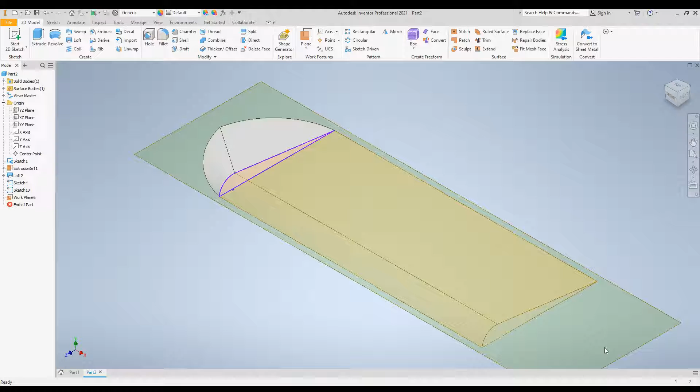So I'm going to click on that, and then I'm going to click this side edge. In order to define a plane, you need two lines. As you can see, this gives us the plane that goes along the bottom of the glider. Now if you look in the model list here, we have a new work plane.

We're going to right click on that work plane and start a new sketch. Because I already did this at the top, it's taking me there, but we're going to want to scroll all the way down here to the bottom.

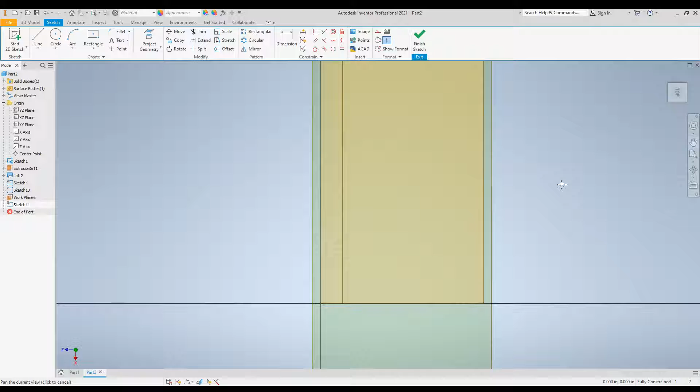You can create some guidelines and things like that to help constrain your arc so that it's symmetrical with the top. I'm not going to do that. I'm just going to wing it here so you get the idea quickly.

You want to make sure that your corner points line up with the extrusion, and you'll know they line up because they turn green. Anything that's lining up turns green.

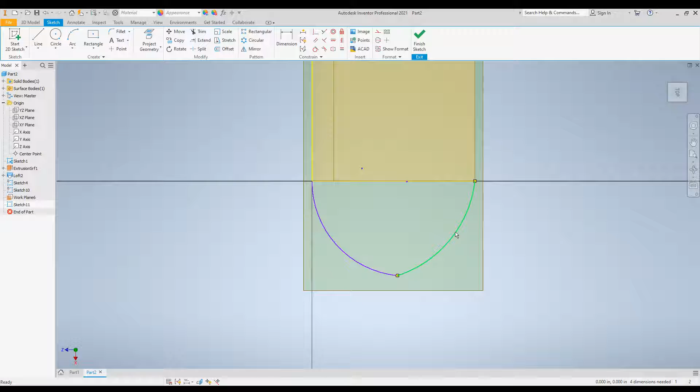Notice I have my two points on my arc here, but I don't actually have a closed loop yet. So the way we're going to close the loop is if I click on and highlight the arc, I'm going to right click, and there should be a tool here that says close loop. So I'm going to click on that, and click OK.

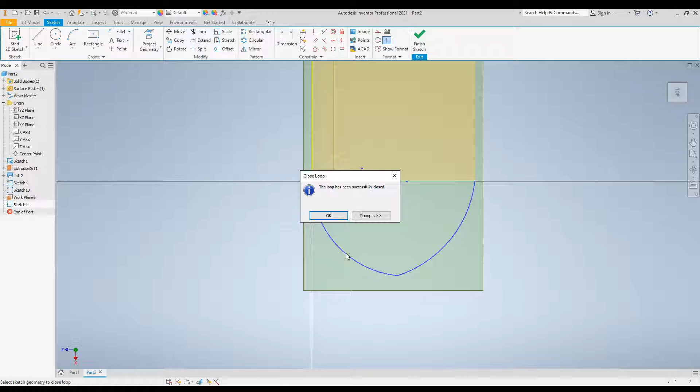I'm going to click this line in my extrusion, then click this line in my loop, and it says my loop has been successfully closed. In order to extrude, your loops need to be closed. So if you're having trouble extruding, even with your cambering line, double checking that it's a closed loop is always going to help.

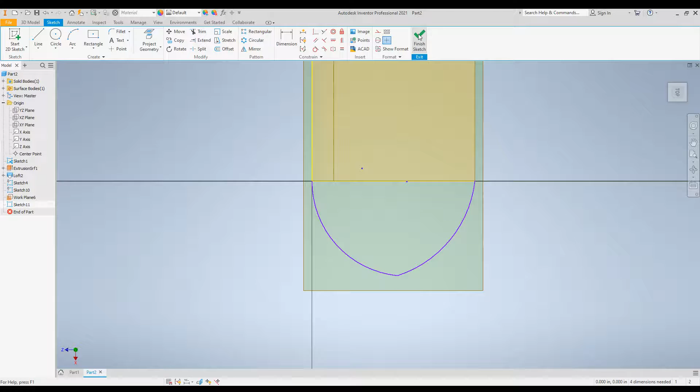All right, so now I can close this sketch, and I've got the bottom part of my shape. Now I need to do the cambered part of my shape.

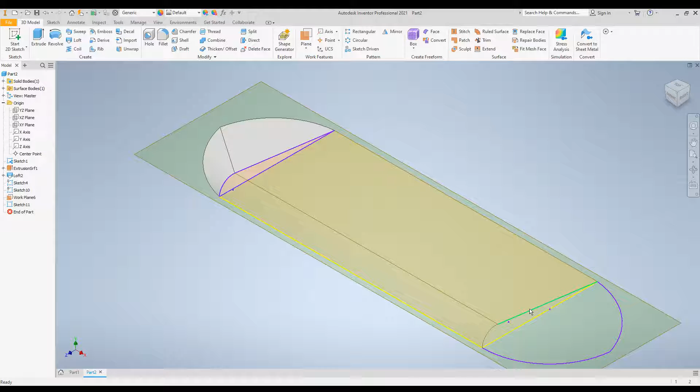As you recall, or maybe you didn't recall because you didn't build this with me, I made this sketch over here and then extruded 10 inches to the right. So this end is actually just the end of the extrusion, not a sketch. What we can do here is right click on this and give ourselves another work plane. Remember, we need at least two lines to get our work plane.

Why isn't it letting me click OK? It's not happy. For some reason, I'm going to escape and do this again. So I'm going to click this line, work plane. I want this line, but it's not letting me pick it. Why? Okay, let's try this one. Work plane. It's definitely not happy. Why? What did I do wrong?

I'm confused, it doesn't know which plane I want, and it's not letting me pick. Finally, is it letting me pick stuff now? It's just not asking me if I want that work plane. Oh, but it actually made one of them.

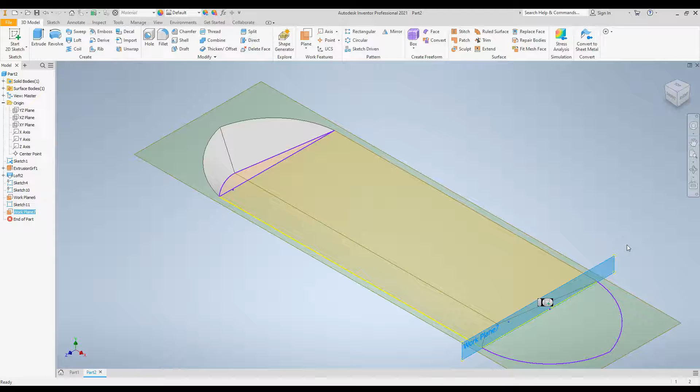Okay, so I'm going to delete one of these so it's not so confusing. All right, so now I've got this work plane. I am going to open a sketch. I'm going to click on the work plane and do a new sketch.

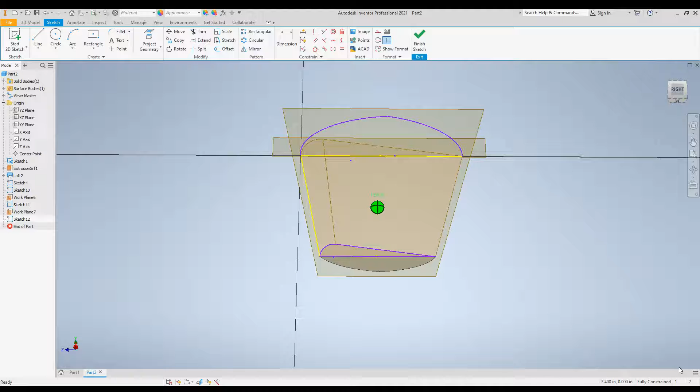Now notice I'm looking kind of at the sketch from the other side. That's not actually the sketch from this side. So if I change the angle here just a little bit, you'll see that actually it is showing me the sketch. Why is it doing that?

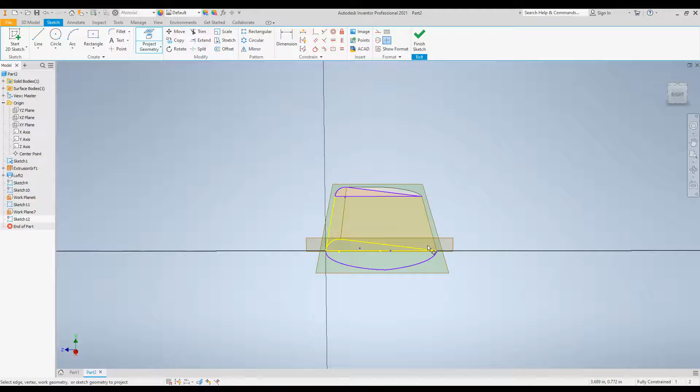Oh, no, it isn't, it's showing me the other one. So what we need to do is project the geometry from this other sketch onto this sketch here. So I right clicked on the line, then clicked project geometry, and I'm just clicking the next one here, project geometry, then clicking this one here, project geometry. So what I should have now is this sketch should contain the geometry from the end of the extrusion.

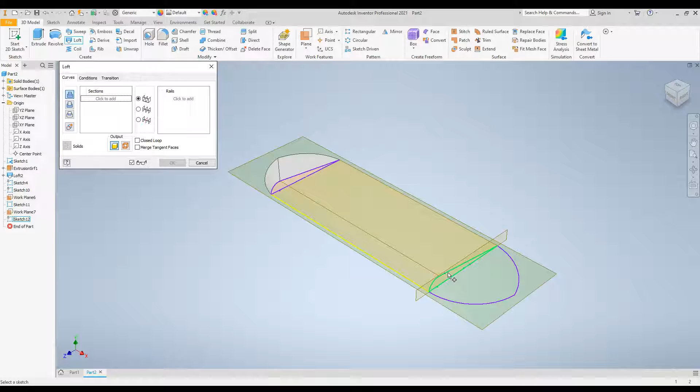Notice that I've got those yellow lines there. So I'll know if this worked when I go into my loft. When I click on sections, notice that it now highlights. And then I can click on this bottom section, it also highlights. And then when I click OK, I have my extrusion.

So the key here is that those two different sketches, the horizontal one here, and this vertical one, need to connect to each other. And the way that you connect them is by having that geometry projected onto both of them.

So the first one I had drawn it, and then I was just projecting that drawn version into the vertical one. So if you're trying to loft, when you go into the loft tool, if you're trying to click on a section and it's not letting you grab it, it means that those two sections aren't connected, and you've got to project the geometry of whatever line is found in both of those planes.

So once again, I already had the other side done, but you would have to do this a second time to get the other side of your glider done.

The other thing that you could do is you could extrude from the middle out to half of your wingspan, do one edge, and then do what's called a mirror. The mirror tool is up here.

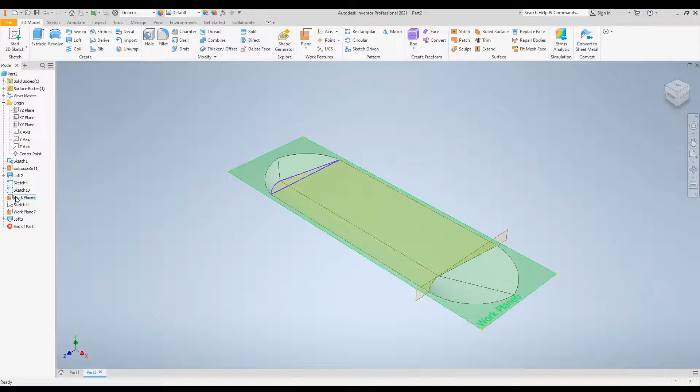So if you're mirroring, let me delete all of this stuff that I did here. So now I'm just going to pretend like I just did half of my wing, and I want to mirror the other half. I'm going to click on mirror.

First, you pick the feature that you want to mirror, so that's going to be all of this. You need to click both of them. And then you want to click on the mirror plane, which is just this little edge here, which actually is not a plane, so it's not going to let me click that.

So that little strategy isn't going to work unless you actually add a work face again and project that geometry onto a work face. So we have to add a new work plane.

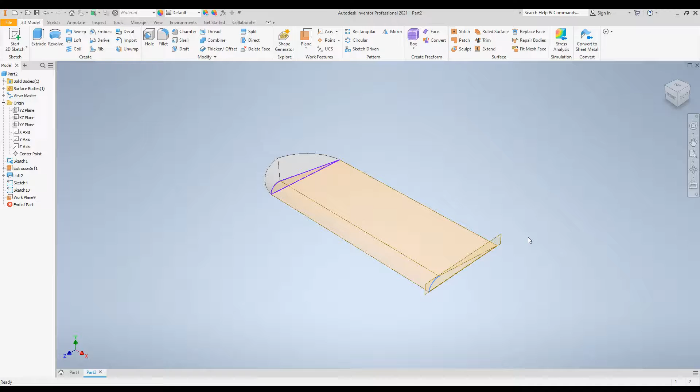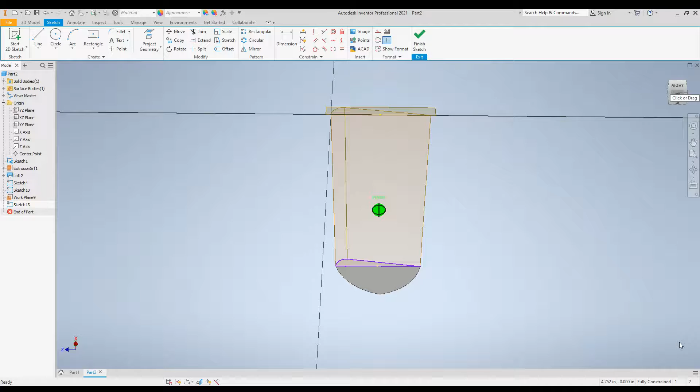We're going to open a new sketch on our work plane. Why does it keep flipping around? I'm trying to scooch it over so I can see it better.

All right, so I'm going to click this line, project geometry, click this line, project geometry, click this line, project geometry. Now I can finish my sketch.

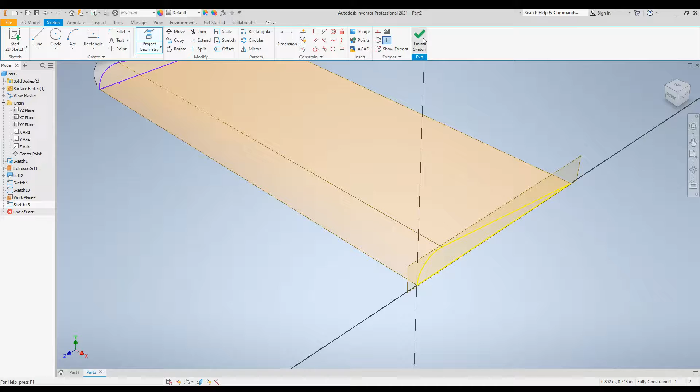And now I should be able to mirror. So if I click mirror again, pick my two features, click mirror plane. Now I should have a plane here. It's not really liking it.

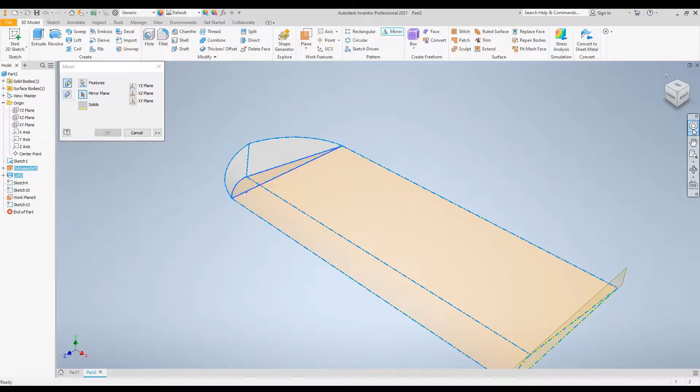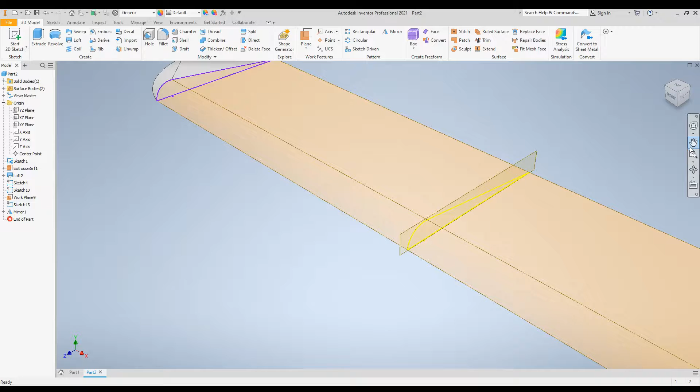And it doesn't want to move so I can see it. I'm not using a mouse, so that's kind of a pain. Mirror plane. There we go, I just had to get it in the spot where it would let me pick it. And now if I zoom the whole thing, I have a twice as long but similar elliptical wing.

So either one of those strategies will work for you, pick whichever one. Now, one other pointer: when you go to make your cut file, you're going to want to make a bunch of the cambered pieces along this edge where they're all the same.

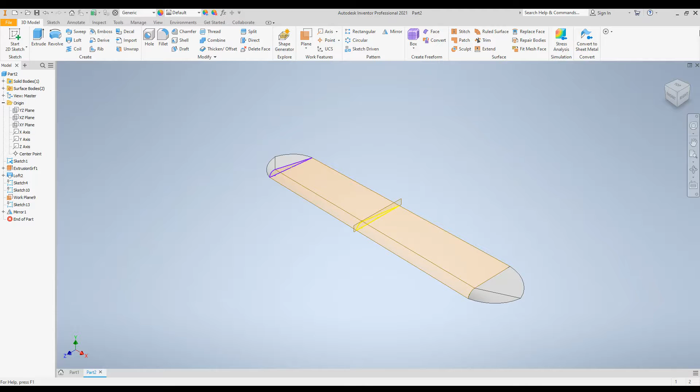For this section, you can either do slices, which will be a different video, or you can cut a piece that is literally just the top view. Sorry, my fingers are in the wrong spot on my touchpad. So you could cut a top view, which would just basically give you this flat shape.

Then you would glue down your cross bracing all along here, and then these end pieces would basically just be shrink wrapped down around the edge, and they'll naturally just kind of taper there. So some different ideas when it comes time to be doing your wing.

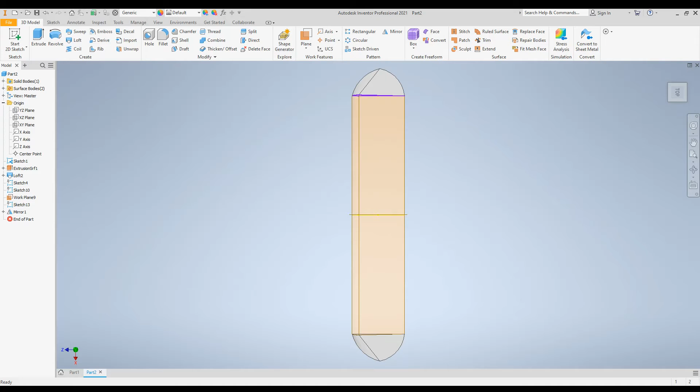Anyway, so there you go, elliptical wings for dummies. I hope you successfully design your elliptical wing. Since you picked a hard one, you deserve it.